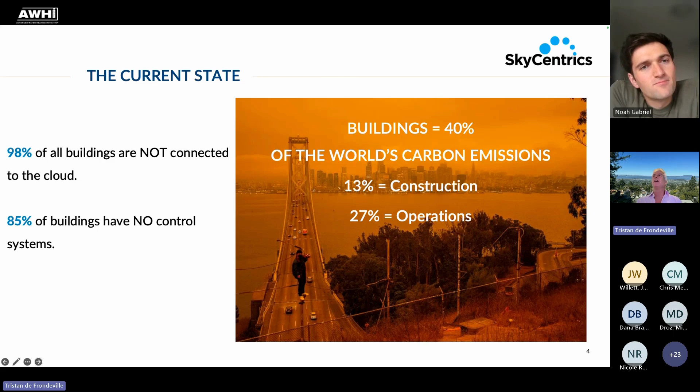That's why SkyCentrics, even though it started off with CTA 2045 modules, we've made what we've called the SkyBox, and we're going to show that.

So why is it important to try and have connected dynamic daily signals? This is July 2019, it's on our website if you want to see it and use it. This is all the weekdays of July 2019 of Cal ISO, and the purple line is the one that includes the renewable energy. So that's actually the demand on the grid.

Think about time of use, right? Time of use is trying to solve that peak and ideally fill the lake with shifted load. But look at how the lake changes in size, changes in start time, and that's every day in one month, every weekday. So I think it's really important for us to start heading, as Cal Flex Hub has studied and others are talking about, toward flexible daily flexibility.

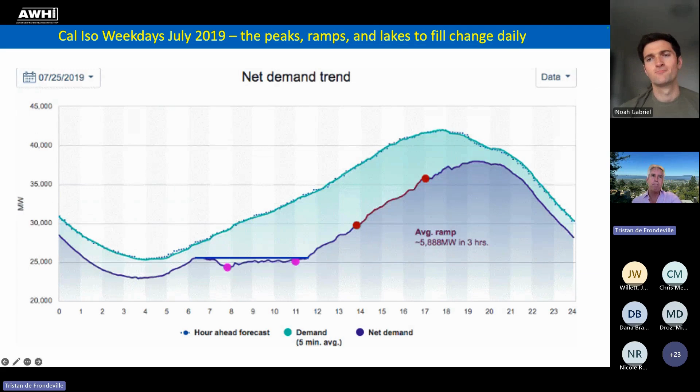And that means you want to have connected loads that can get the MIDAS signal from California or elsewhere. So now I'm going to go back and show you this screen, the morning peak, the classic morning peak. Most utilities have this morning peak, 6 to 8 a.m., and then obviously the big evening peak.

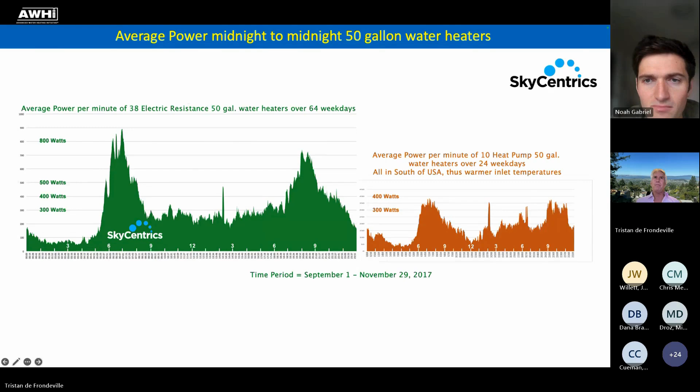And then the orange is heat pumps, right? Lower, but still a good 300 watt hours for 2 hours in the morning, and then it's a little more spread out in the evening. So obviously we want to take those peaks—this is a longer animation, I'm not going to stick around, but you take those peaks, slice them off, and fill the lake.

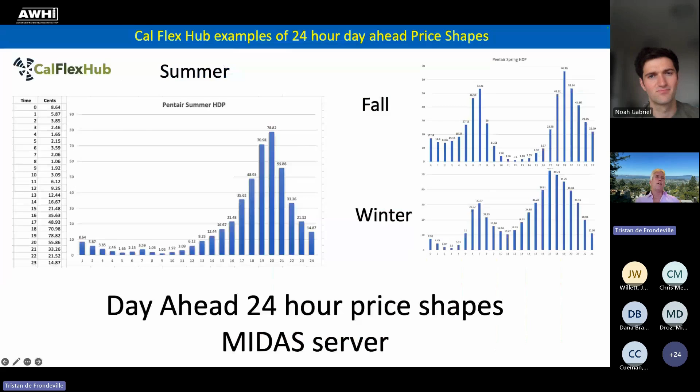All right, I apologize, I'm going in the wrong direction. Whoops. So this is just a reminder one more time: 98% of commercial buildings are not connected to the cloud, their equipment is not connected to the cloud. So we want to free the machines.

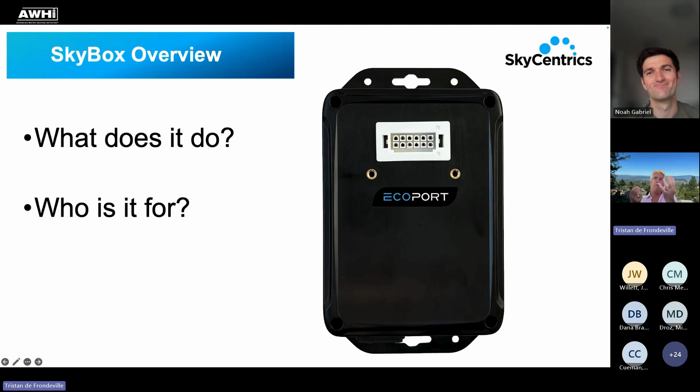So here's SkyBox. You can see that it's got an EcoPort plug socket, we call it. It's got the screws. We made it big like this because we thought we had to provide the official platform for the module. And what does it do, and who is it for? So this is the side views. And what does it do?

It talks Modbus TCP or Modbus RTU to legacy commercial building equipment. For the last 50 years, certainly for the last 20 years, most building equipment—boilers, chillers, big rooftop units, HVAC systems—are made to talk to building management systems from Johnson Controls, Siemens, Schneider, etc. And how do they do that? It's 50-year-old technology, it's not internet per se, it's trying to be TCP/IP. It's Modbus or BACnet, usually Modbus for the machines, BACnet for supervisory building management systems.

And again, after 50 years, only 15% of buildings have this controlling supervisory system. Otherwise, these machines have the ability to talk Modbus, but nobody's doing it. It's literally standalone, got to go by with a clipboard. So we made this device to literally sit next to the machine, plug into it—you see the RJ45 cable.

They either have that, or we have a $20 adapter that can give them the green screw-down terminals you might be familiar with. And that plug looks like a 110 volt plug, but you can actually get a 240 volt cable and plug it into the box, and it is UL approved for 110 to 240.

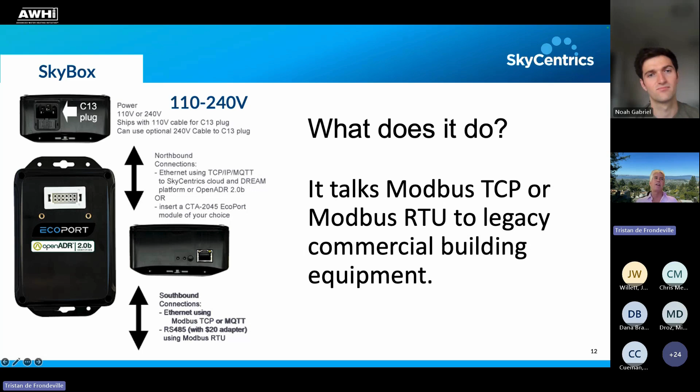And what does it get you? It gets you EcoPort certification and OpenADR certification. In the EcoPort certification, we've talked about connectable versus connected out of the box. So when you put the EcoPort next to a machine, it's connectable, open standard. And the machine manufacturers we work with, like Small Planet Supply with their water drop systems, Small Planet Supply, they are now on the EcoPort qualified product list as a fully independent listing because they worked with us and used the SkyBox certification to say, hey, we are EcoPort ready. Everything's ready. And then OpenADR, they only get a qualified product list there under the SkyCentrics listing.

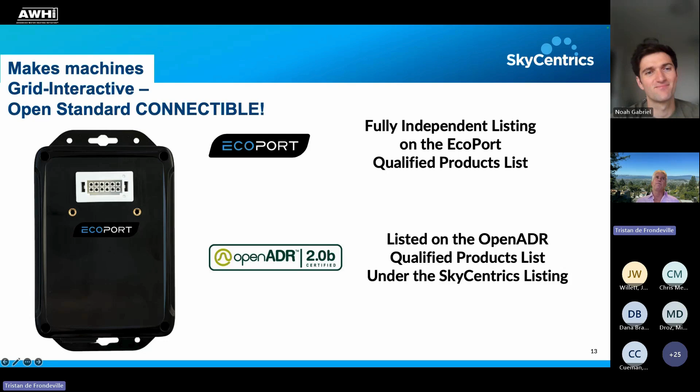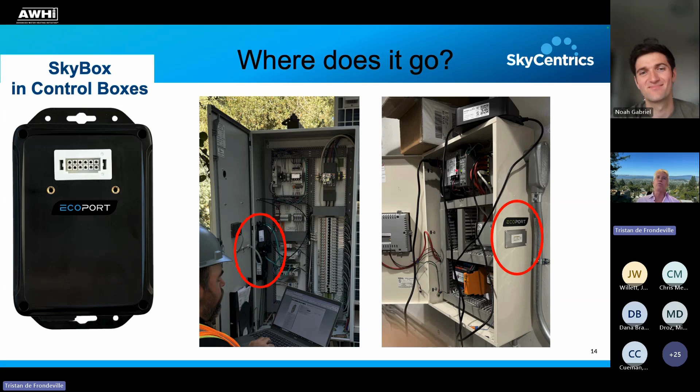And look at how this manufacturer did something really cool over here. They put the EcoPort plate on the outside, because obviously if you close a metal box, you'd be sealing up the module. If it's a cellular module and doesn't have a flexible external antenna to stick out a hole that's usually in the bottom of these boxes - you can kind of see those waterproof holes - now we have that module and the possibility for an external antenna extender. So that's good, and when you get this whole piece, you're connected out of the box instead of just connectable. The good news is for all of our other CTA 2045 EcoPort module makers, any module can go into this and have access to these commercial building machines.

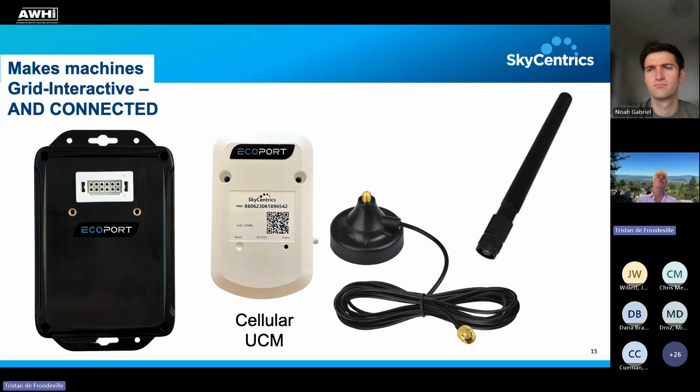Very exciting. Once you're connected, you can also put internal daughter card options into the box. So yes, you can buy any EcoPort module from SkyCentrics or anyone else, but you can also get a daughter card option inside the box just to start you off with your connectivity. Those can be cellular, Wi-Fi with cellular fallback, cellular with satellite fallback, or LoRa.

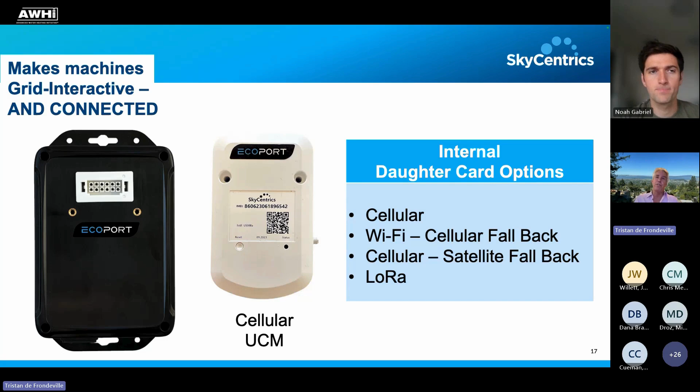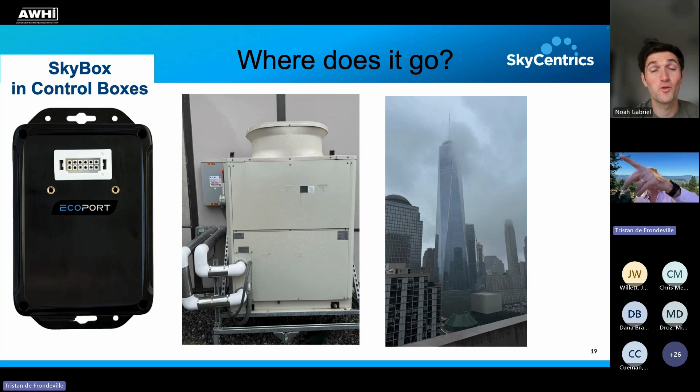And where does it go? Here is a big heat pump, and that heat pump was on top of a 30-story building in New York, down near that new tower. So that was pretty exciting. And then when you went inside the building, you saw that big control box I showed you. Now, who is it for?

Well, we have a whole bunch of functionalities for this box. Number one, isn't it great that a utility - in the past we had to maybe wait until they installed a water heater somewhere for them to test EcoPort. Well now they can put this box on a tabletop, in a conference room, and literally plug any module in, and it acts as a water heater emulator. So they can send signals, they can see what the water heater's doing. We think that's really useful for utilities to get more familiar with CTA 2045 EcoPorts.

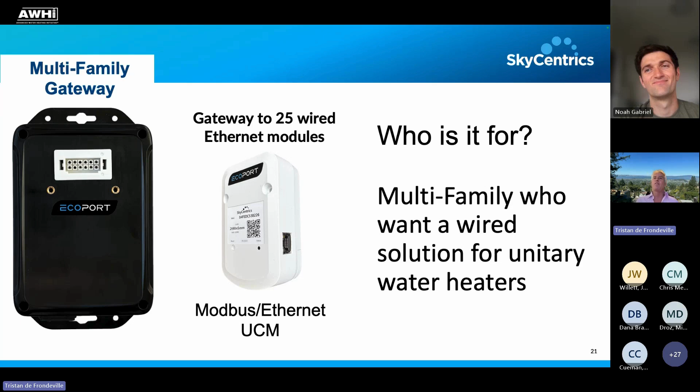Also, that box for multifamily water heaters, when there's an individual water heater in every multifamily unit - it's more for new construction - that box can be a gateway for 25 wired Ethernet modules, which we're now making. So those Ethernet modules, even though we're cellular and Wi-Fi, we love wired bomb-proof connections. And as you know, in multifamily, which is a really exciting space for all of this water heater control, every apartment has their own Wi-Fi, so you kind of want to stay away from Wi-Fi if you can. Hence, a wired module is really nice to have.

And then amazingly enough, we can connect - there's a lot of off-the-shelf little controllers that have an Ethernet connection that are very inexpensive with relays and sensor ports. So we didn't put it on the box because it's so easy to add a little external box for whatever we need. And for SoCalGas, we have a pool control system for any public pool. I don't know if everybody knows this, but public pools are on 24 hours a day.

They're heating 24 hours a day. In California, for sure, I don't know about other states, you're not even allowed to put a cover on the pool. A cover would keep the heat in the pool at night really well. But in a public pool in California, you're not allowed, because somebody might fall under the cover and drown.

So we do optimum start for gas pool water heaters. We turn it off at night. We watch the weather, we watch the wind, and we turn it on at exactly the right time so that at 8 o'clock, 9 o'clock, whenever it opens the next morning, it's on.

Usually public pools are 8 a.m. or 10 a.m. start time to 10 p.m. That means we're getting 12 hours of off time, letting it cool. And because of all the data we're getting, we're able to turn that gas water heater back on at the right time. We're also ready for gas demand response, which is starting to come down the pike.

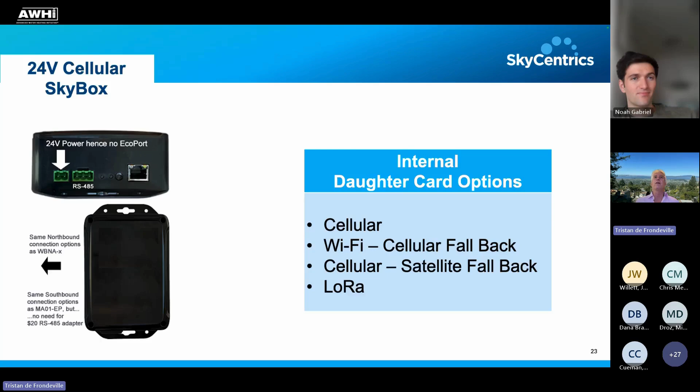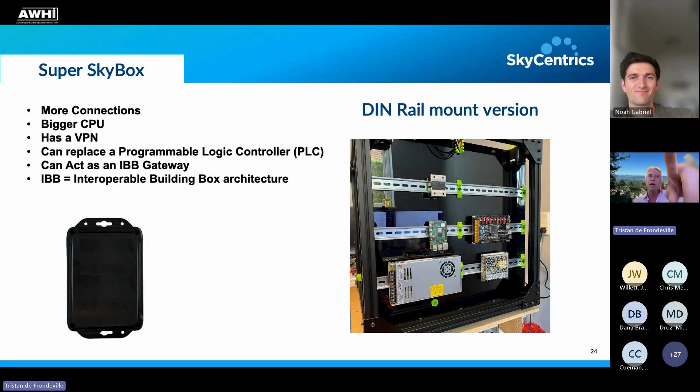And that's going to be DIN rail mounted, by the way. So see those DIN rails in all those controls—it's going to be smaller, DIN rail mounted, and we're very excited about that.

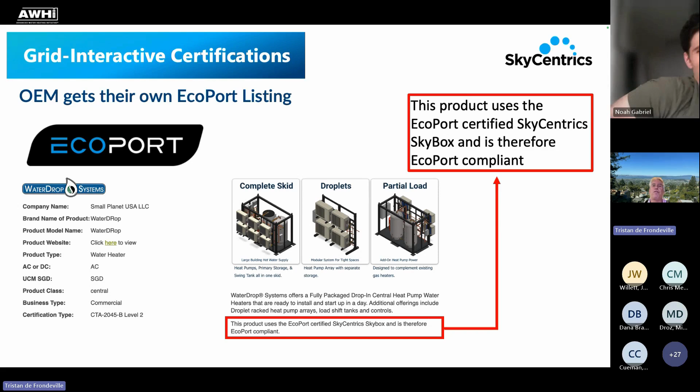Okay, so who we work with, where are we, what are we doing? Mitsubishi Electric—in this group, I think a lot of you have seen the Bayview apartments with the QAHV heat pump water heater. Small Planet Supply presented last week; they're working with the Sanden Eco2 controller. And then Colmac is hoping to very soon be on board, and it'll retrofit any Colmac system. Obviously, it's available for others as well.

And multifamily is really a sweet spot. These are garden style apartments in Hawaii, and you can see there's 6 apartments per building. We were able to do EcoPort water heaters for everyone and put a SkyBox gateway in every building. That's exciting there—that is a picture of the Bayview apartments right there. So everybody's heard about that.

And why is multifamily so important? Number one, it's bigger loads. It's one landlord, one developer, or one owner typically.

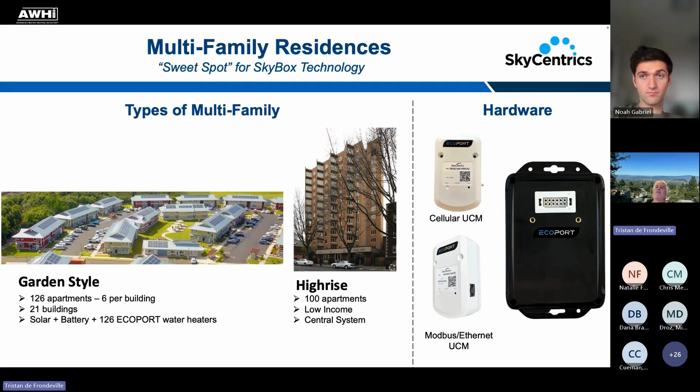Obviously, condos where every apartment is separate is a little less exciting. You talk to one landlord, you get a big unit. The Bayview is about 18,000 watts. When you compare that, and that's a heat pump, right? If one heat pump water heater typically uses 400 to 800 watts, 18,000 watts is a big difference. And that's the central system heat pump that's on Bayview.

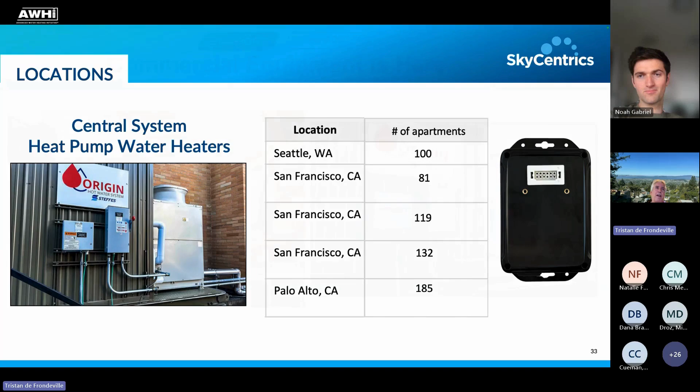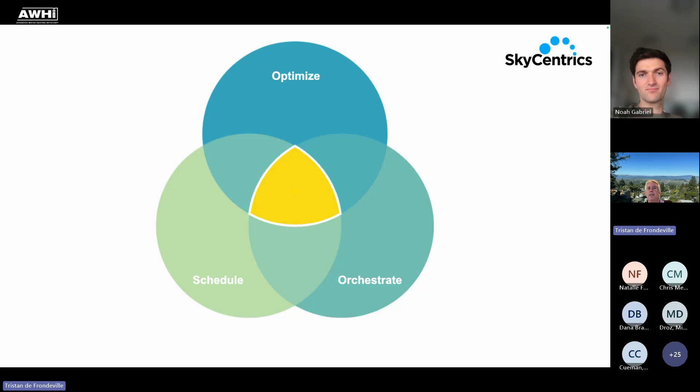These are other apartments and apartment numbers that we're doing. So we really appreciate all the engineers we've worked with. The engineering companies are excited to have the data. That's again Bayview. You've all seen that. So what is the whole point of this, right? Now that we're freeing the machines, giving the machines a voice, letting them easily get up to the cloud, get weather data, what are we doing? We're optimizing, we're scheduling, and we're orchestrating.

So how does the SkyBox optimize energy use? Well, the engineering companies we work with monitor and optimize performance to increase the COP and decrease the use of less efficient swing tanks. So in all those apartment buildings I showed you, that was the most important thing, the engineers working with the OEMs to help everybody improve the COP and make them more efficient. Keep that 300 to 400% efficiency.

And then the swing tanks are an electric resistance tank, sometimes even a gas tank, and you want to figure out ways to use that as least often as possible. So this access to the data, to the controls, either directly to the controls of the machine or just being able to send load up and shed signals. That's how we do that.

Now, obviously, there's also time of use. So some of the apartment buildings we showed you are in California. They have a 4 to 9 p.m. time of use where it's more expensive. So after tweaking it and optimizing it to not use the swing tank very much, the next thing they do is they want to try and load it up and turn it off from 4 to 9 p.m.

So what you're seeing here is some water heaters reporting the advanced load up. Now, this was interesting. These were water heaters that only reported the advanced load up when you sent them an event. But we've worked with the manufacturers to now get that orange curve, that orange part of the graph, to happen all the time, right? So there's a parallel line saying basically, hey, if you do an advanced load up, you'll get this much watt hours of energy take.

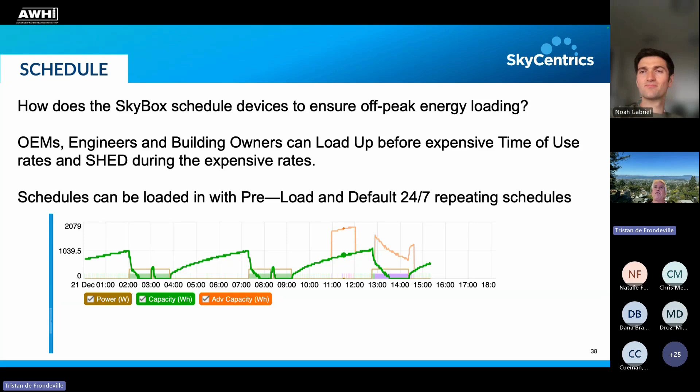Then finally, we orchestrate. So optimizing and scheduling is for the building owner, right, to reduce their costs. And orchestrating is obviously what we're all looking for. How do we orchestrate loads to flex to grid and carbon peaks? So there's the MIDAS server in California delivering prices, time of use rates, even greenhouse gas emissions data. So if somebody wants to be really focused on greenhouse gas emissions, the good news is it's typically very aligned with the prices. So you can be a good citizen for both.

And it's critical to have good default behavior when connectivity goes down. And this is an important nuance. So now that we're trying to have more connected devices, there's a few things to think about. What happens if you have a million water heaters, and they're now acting like a peaker plant? And every day they're providing value to the grid. And for some reason, 500,000 of them go offline because of an internet outage. Well, do they all instantly go back to their normal random behavior?

And you saw those peaks of our water heater data, right? Their random behavior is coming on and peaking at exactly the wrong times. So if 500,000 lose connectivity, we don't want them to have random behavior. We want them to have a default schedule that they turn to that's at least a reasonably good citizen. You can imagine, hey, load up before 6 a.m., turn off from 6 to 8 a.m., load up until 4 p.m., turn off until 9 p.m.

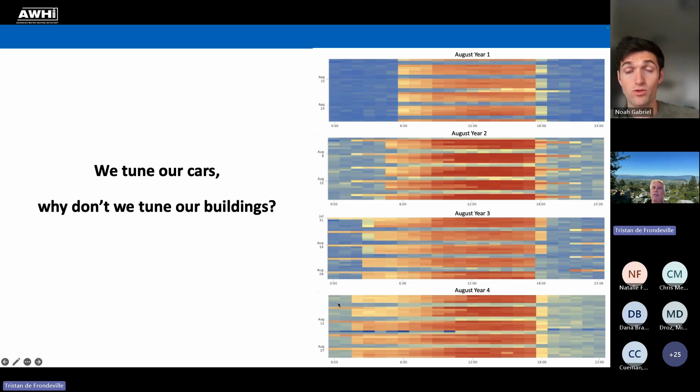So let's tune our buildings. What do we need to be able to do that? We need analytics, we need data, we need connected loads, and we can reverse this negative behavior.

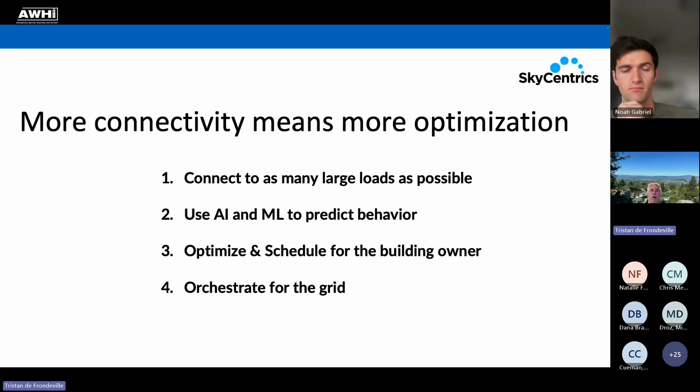And I just want to finish with a summary of what we covered. We want to connect to as many large loads as possible. SkyBox helps do that. We want to start using AI and ML to predict behavior and therefore have better ability to pick the right times to shed the load, load up the load while maintaining customer comfort. We like to say we optimize to cost, comfort, and carbon. And finally, optimize and schedule for the building owner, orchestrate for the grid. And that's my presentation.

Really excellent, Tristan. Thank you so much. Love the filling the lake analogy. I don't think I'd heard that one before, and it's really perfect for alleviating the duck curve. So yeah, if any folks have questions, feel free to come off mute and let Tristan know, or I also have some questions too. Chris? Yeah, thank you, Tristan. That was a great presentation.

So with the load shifting in there, you're shifting away from peak pricing to lower costs. Presumably, once you get the deployment of a technology like that wide enough, you're going to start to impact the actual grid load and have a real impact on those peak times and take that off. Have you guys done any analysis to try to estimate what that impact would be on the wholesale price of electricity in those peaks? Because that's going to impact more than just the participants in your system. That's going to impact the market writ large and have ripple benefits. Yes. Yeah, Chris. So that's a really awesome question.

As you know, the grid peaks are really challenging for the grid. Certainly the National Lab folks that are on the call often know more about the details of this, but I'm pretty sure that if we could have a perfectly flat line of demand 24 hours a day, the grid would love that, right? They can just predict it, whether it's nuclear or coal. If it was flat, it would be so much easier.